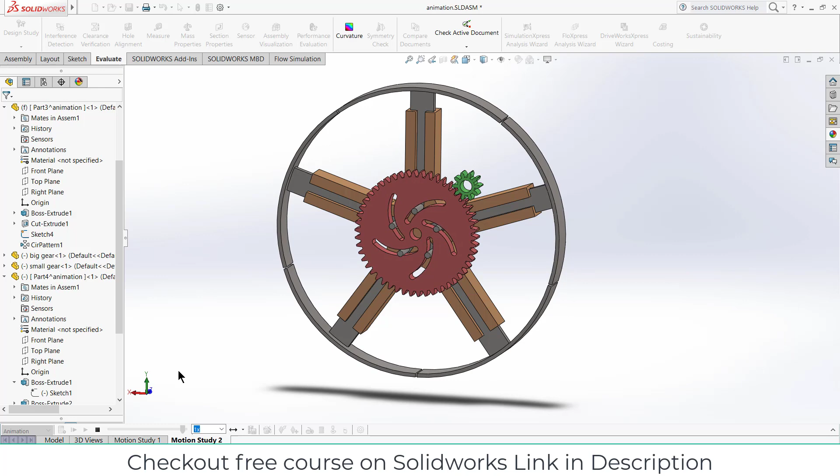Namaste guys, in this video we are going to make this mechanism. So let's start. First click on assembly, click on OK.

Now go to your design library, click on toolbox, click on add-in now, click on ANSI metric, click on power transmission, click on gears, select the spur gear.

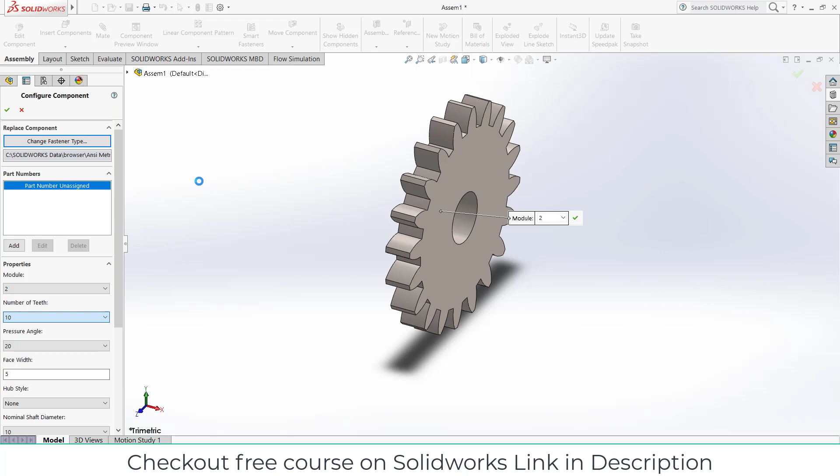Make sure that the module is 2, number of teeth is 20, or let's reduce the number of teeth. Let's say number of teeth is 10. OK, now click on OK.

Close this, select this face, press Ctrl plus 8. Now right click on it, click on sketch. Click on convert entities. Select this inner circle as well. Click on convert entities. Press Ctrl A, press Ctrl C to copy the sketch.

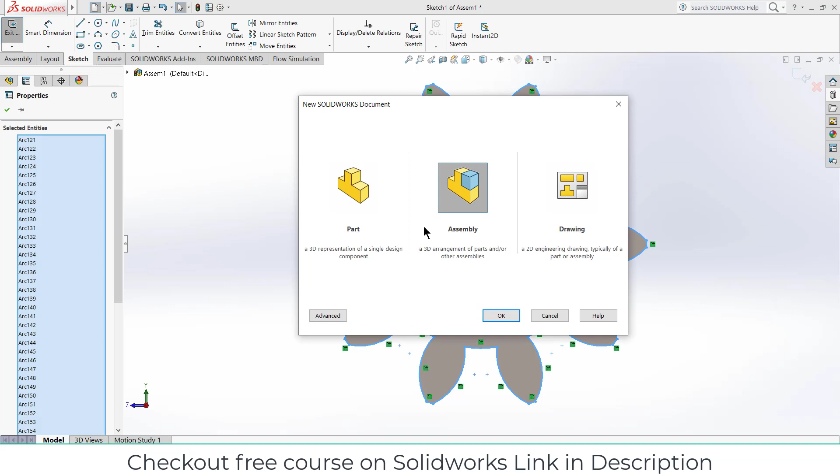Now click on here, click on part, click OK. Select the front plane, click on sketch. Press Ctrl V and go to the features, click on extrude. Extrude up to 10 mm. Click OK.

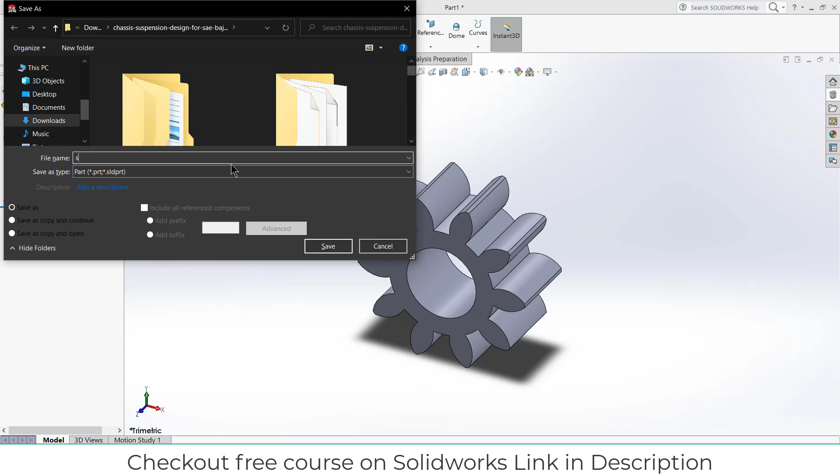Press Ctrl plus S and save the gear name as per your requirement. Small gear, let's name it, and close it.

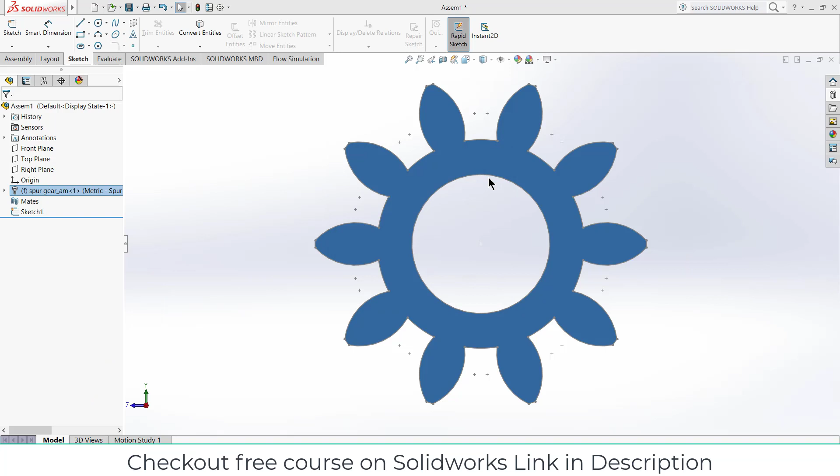A question might arise in your mind that why I am not using this gear. The reason is that when I will save the assembly and use this, my whole design library will run, so I don't want it. That is the reason I'm not going to save this. That is the reason I'm making separate parts.

Click yes. Now go here, click on spur gear, again import it. Now this time increase the number of teeth as per your requirement. I am increasing up to 40, or let's say increase up to 50, is fine. Now click on OK.

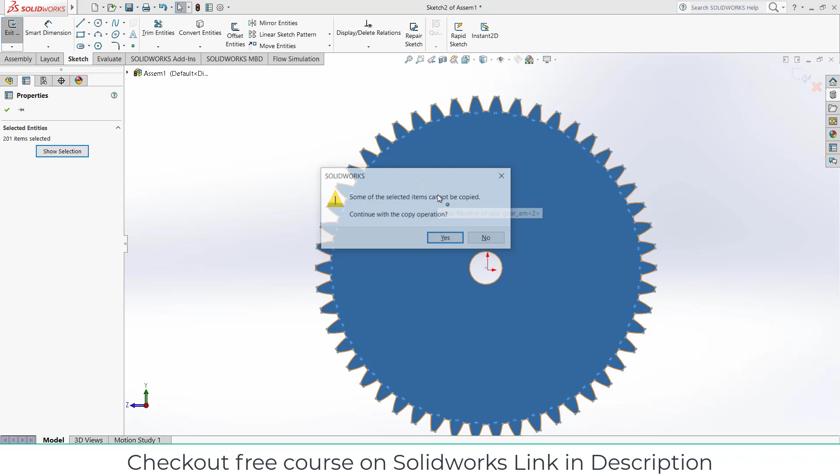Select this face, click on sketch. Now click on convert entities. Again select the inner circle. Click on convert entities. Press Ctrl A, press Ctrl C to copy the sketch. Close this and exit the sketch mode.

Click on here, part, click OK. Select the front plane, click on sketch, press Ctrl V. Now go to the features, click on extrude both face, thickness is 10 mm, click OK. You can save the part as per your name requirement, big gear.

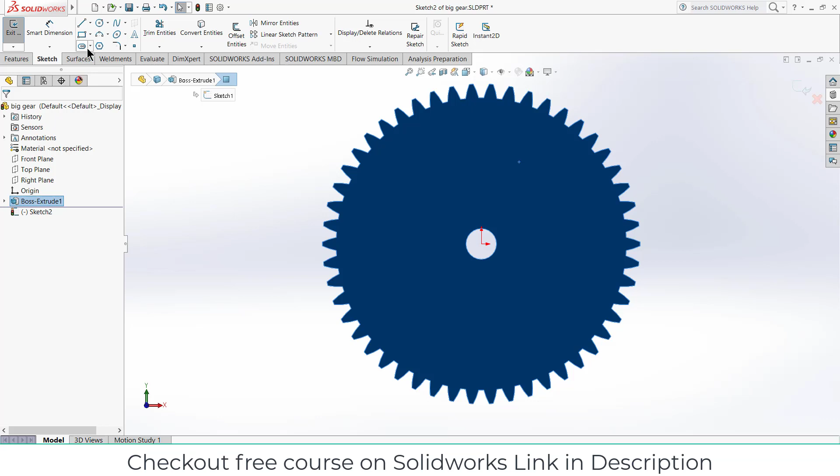After that select this face, click on sketch, press Ctrl plus 8. Now I'm going to make some grooves here. So enter the number of grooves as per your requirement. Basically I'm going to use the slot command, so you can use slot command as per your requirement.

It's not like you have to copy the same slot dimension as I'm doing it, so make it as per your requirement. Sorry, select the slot.

Escape, select this point and this point, make it horizontal. Give it a distance as per your requirement. I am giving it a distance of 20 mm.

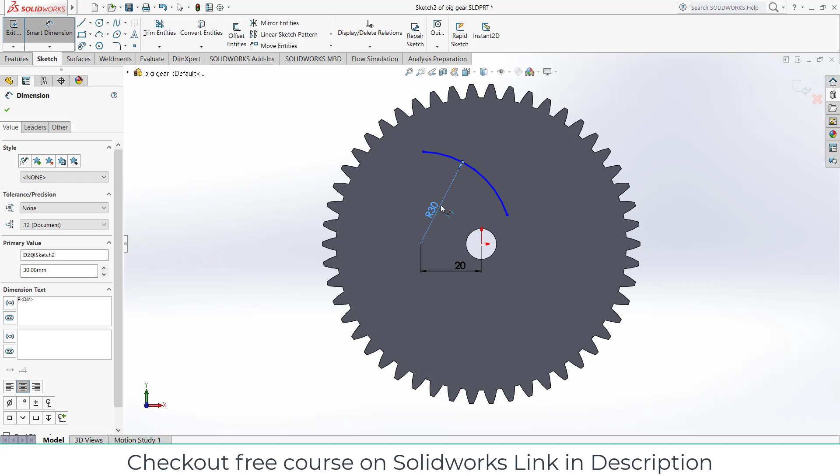And let's decrease the radius, let's say 30 mm, and increase this size, let's say 5 mm.

Escape, select this point and just leave it. After that what you need to do is, or you can also define the angle. Let's say the angle is 70 degree.

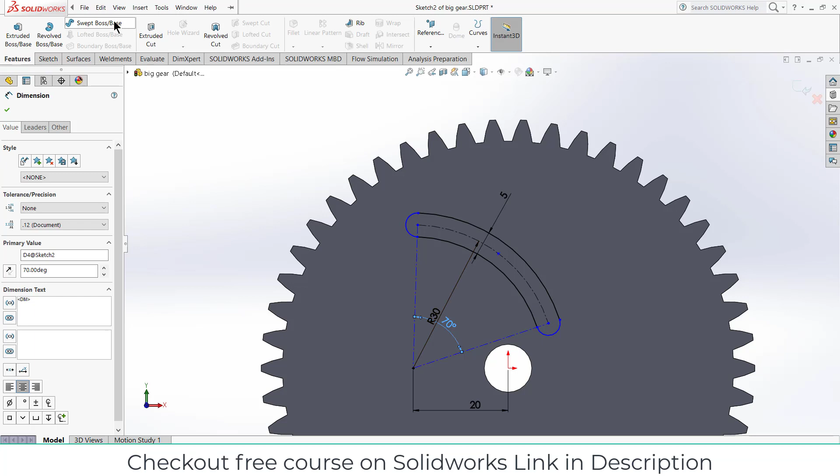And after that what you can do is click on here, click on extrude cut, click OK. And what you need to do is go here, click on circular pattern, select the center of it.

Now increase the number of cut to 5. You can increase up to 6, it again depends on your requirements. So okay, now press Ctrl S to save it.

Now close this and delete the sketch here as well as the gear.

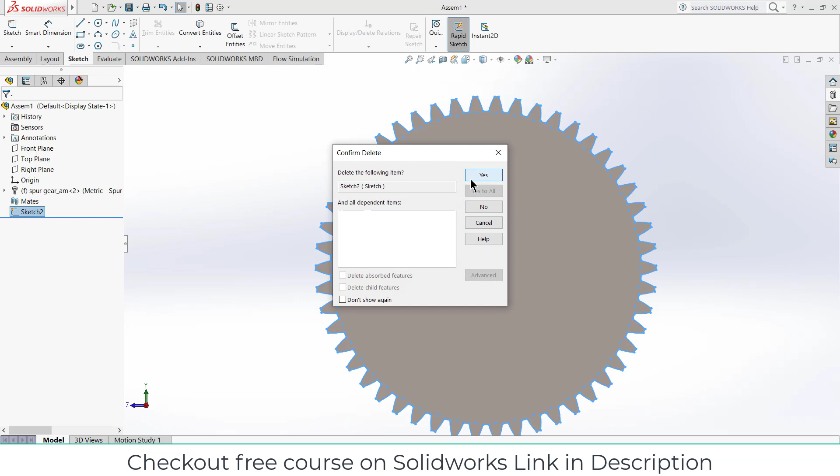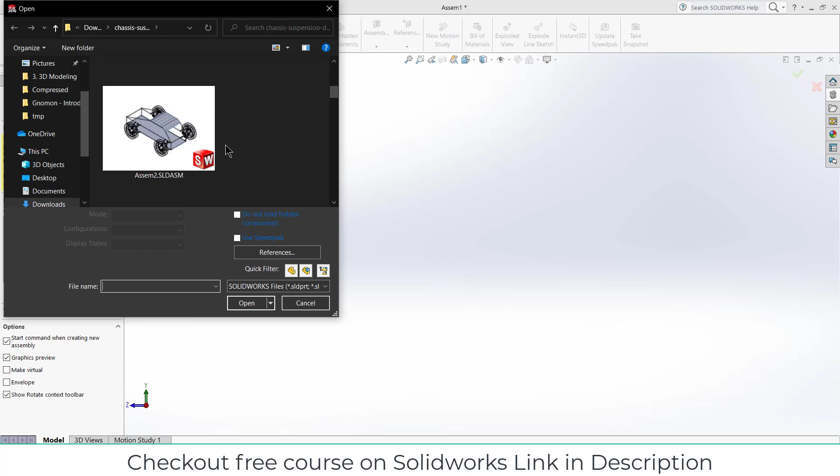Select this one and just type gear. So select this part and this part by pressing Ctrl and click on open.

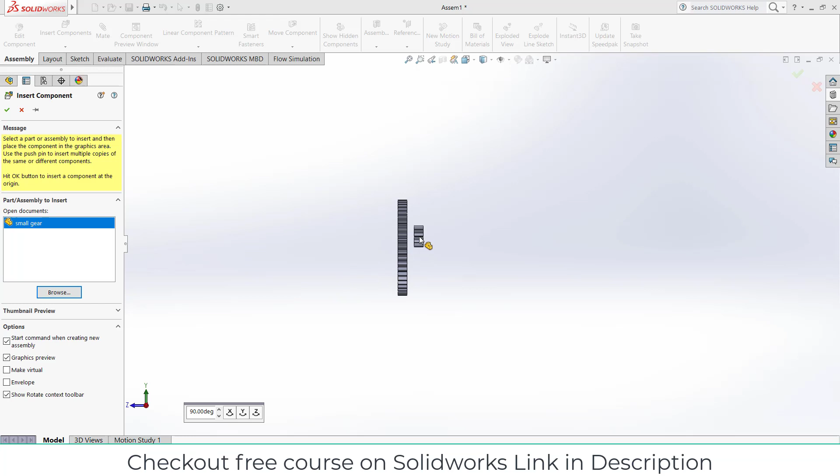Now first we have to do defining mates. So what we can do is select the front plane, or before that select the right plane, click on sketch, press Ctrl plus 8, draw a simple center line, escape and exit the sketch.

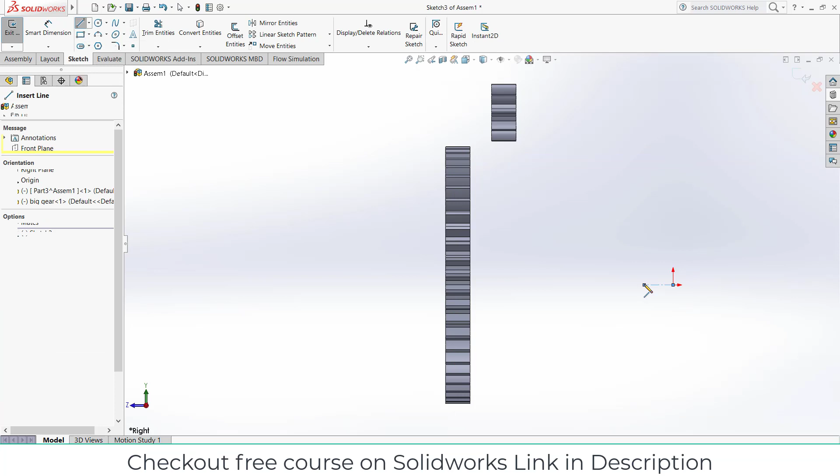Now what we can do is click on here, select this and this line, make it concentric, click OK, select this face and select the front plane, click OK.

Similarly, we have to make something for this. So what we can do is just move this gear aside here, select this face, press Ctrl plus 8, select the front plane, click on sketch.

So I know that this gear has module 2 and number of teeth is 50, so it means that 2 times 50 is 100, so 50 mm from here. And this one is module 2 and number of teeth is 20, so 70 mm. So I can make it anywhere up to a distance of 70 mm.

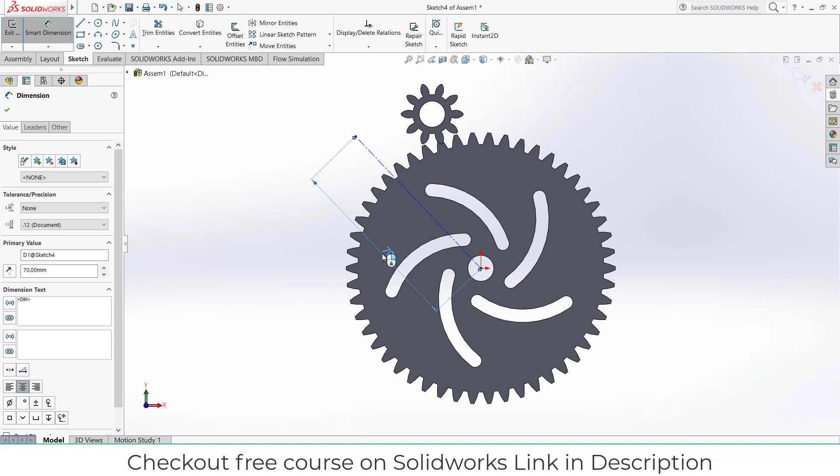So draw a line, make it 70 mm. I'm using simple concept, not something high physics or something else, just using simple engineering. Not 70, 60.

Let's say it will be here. I just saw this design on internet. I don't know what is the dimension, I just simply saw it on internet. I thought I can make it, and here we are.

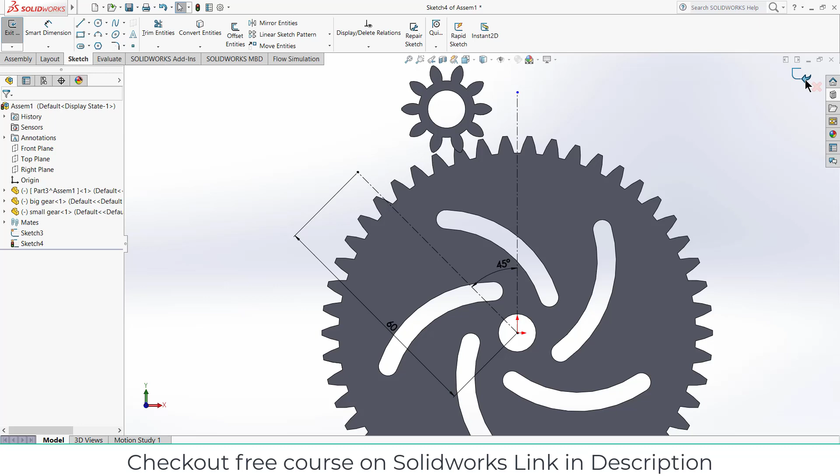Exit the sketch mode, select this face, and by pressing Ctrl select this point, click on concentric. Select this face, by pressing Ctrl select this face, click on coincident. Select this face, press Ctrl plus 8. Now as you can see, this gear is also perfectly aligned, so I don't need to do anything else.

So let's define our mates. Go here, click on mechanical mates, click on gear.

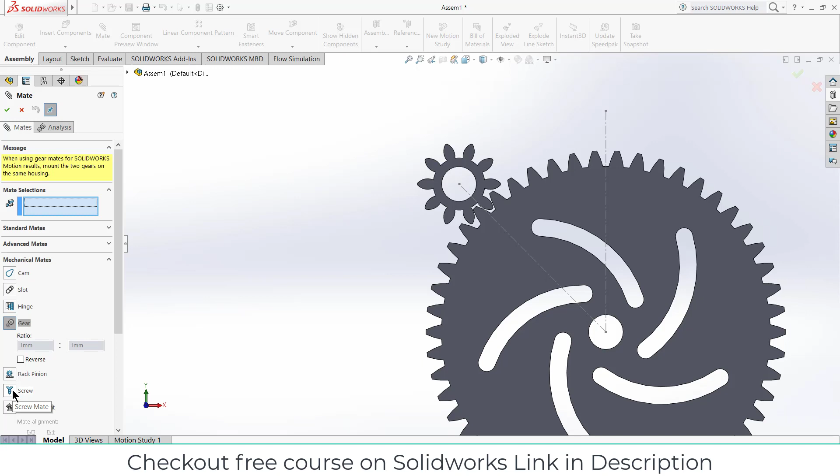Select this face and this face. Now here you can see the teeth is 10 by 10. So this is not the thing we want. Here the teeth is 10, it is correct, but here the teeth is not 10, it is 50. Click OK and close it.

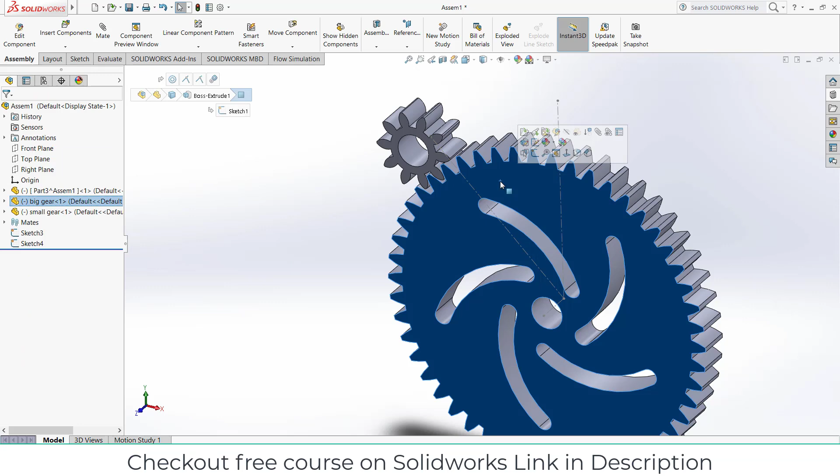Now select this face, press Ctrl plus 8. Now if I try to rotate it, you can see I am getting the correct results. So this is basically what I want.

Now let's make other parts. Remember the first part that we have made here accidentally. Select this part, click on edit components, select the front plane, click on sketch.

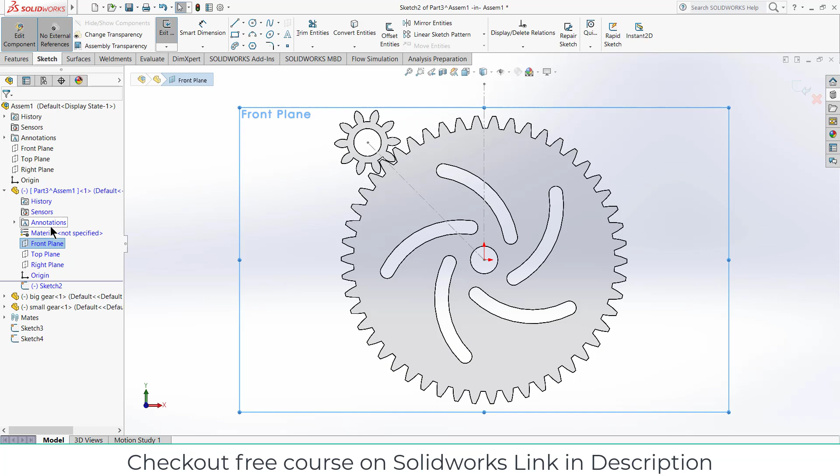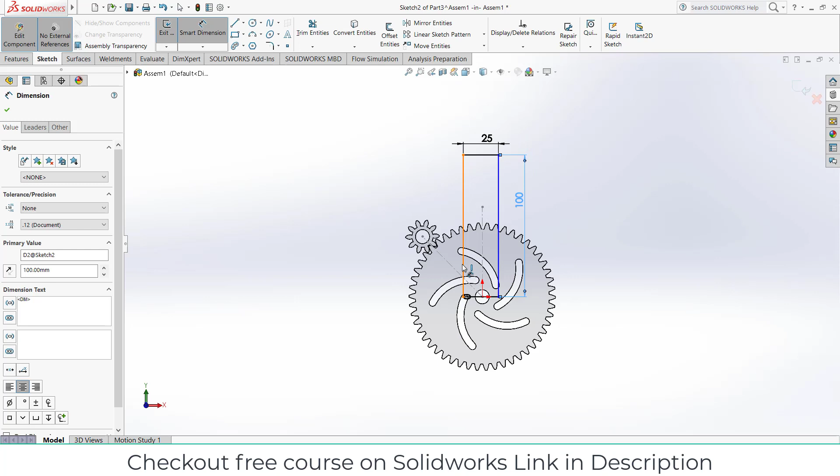So first we have to make some rectangles. Let's make it 25 mm. As you can observe, it is quite small. It is not big because every dimension is mm, so yeah, it is very small thing, but again you can make it bigger as per your requirement. It's an easy one, not a difficult one, so you can do it.

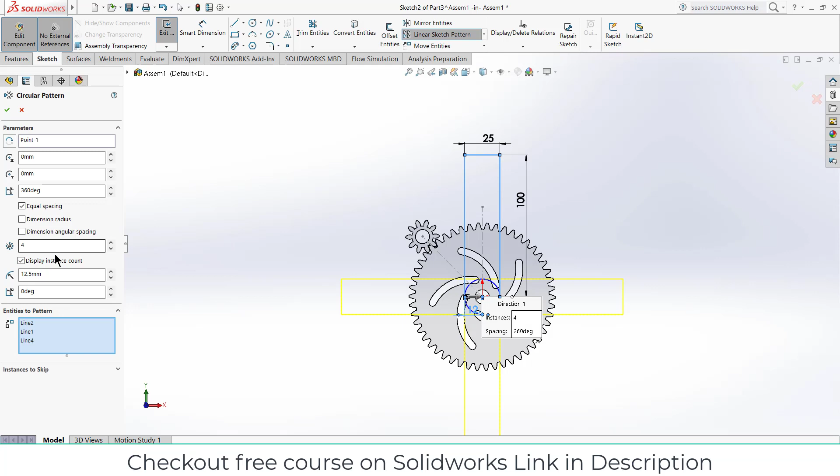25 divided by 2. I'm again repeating that I don't have any dimensions of it, I'm just making it roughly. That's just the thing. And I want to do this 5 times because I have 5 slots.

Click OK. After that, click on here and trim all the necessary lines. Features, extrude it.

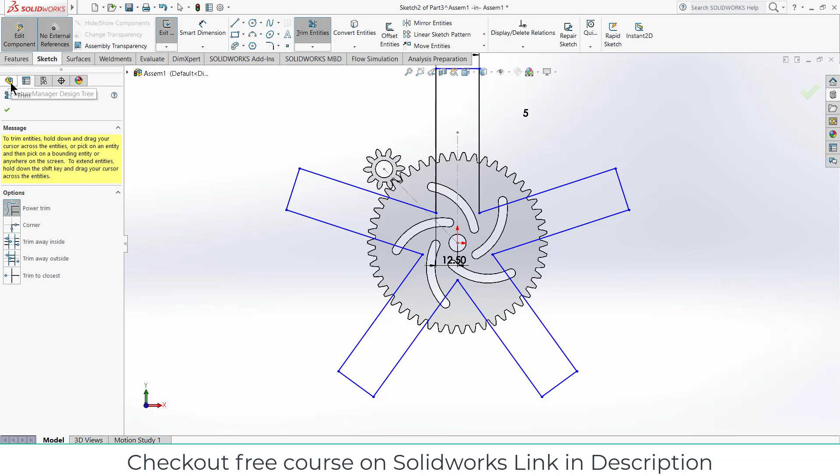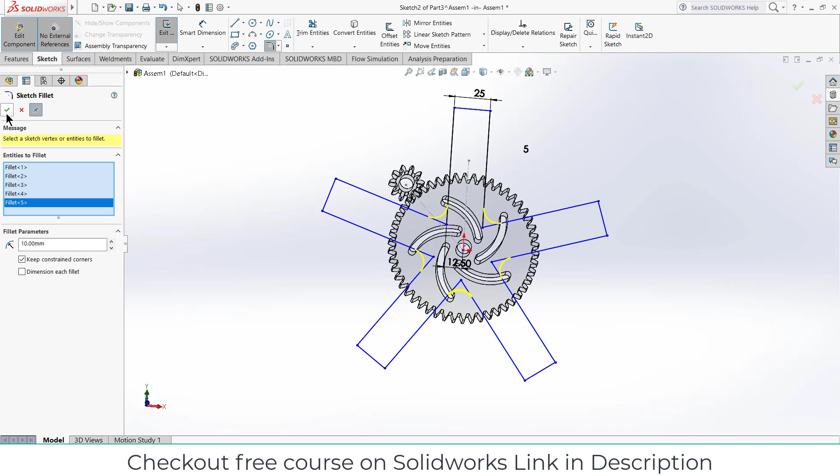Let's say 20 mm. Before do extrusion, let's add some fillet to make it a little good design. Click OK and go to the features. Click on extrude boss base, 20 mm. Click OK.

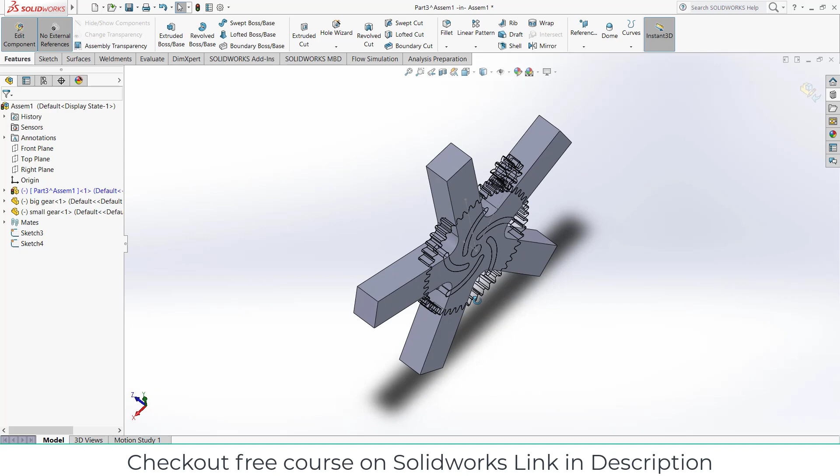Now I have to create some cuts here. So what I can do for that, let's see. First select this face, click on sketch, press Ctrl plus 8. So I can draw something like this.

Now what you can do is select this one, click on construction geometry, and 4 mm. Select this line, first select this line, make it horizontal, and after that give it a distance of 10 mm, and this one is 5 mm.

I'm again repeating that I am just looking roughly. Don't expect that I have exact dimensions or anything else. Even I don't know what are the dimensions, etc. Mirror about this line.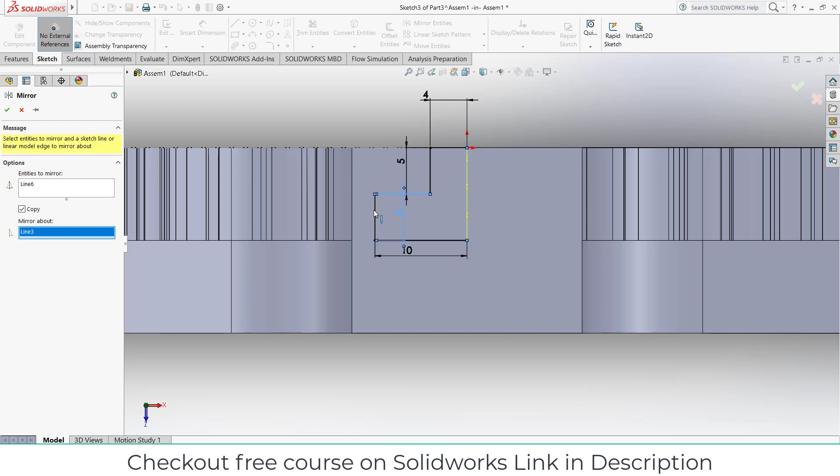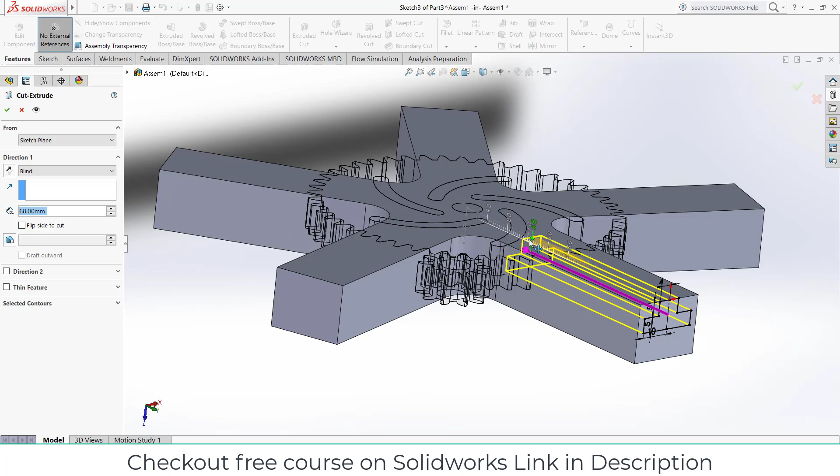Sorry, my bad. So select the line with respect to which we are going to mirror. After that, select the lines. Click OK, go here, click on extrude cut. Increase the distance up to here. Click OK.

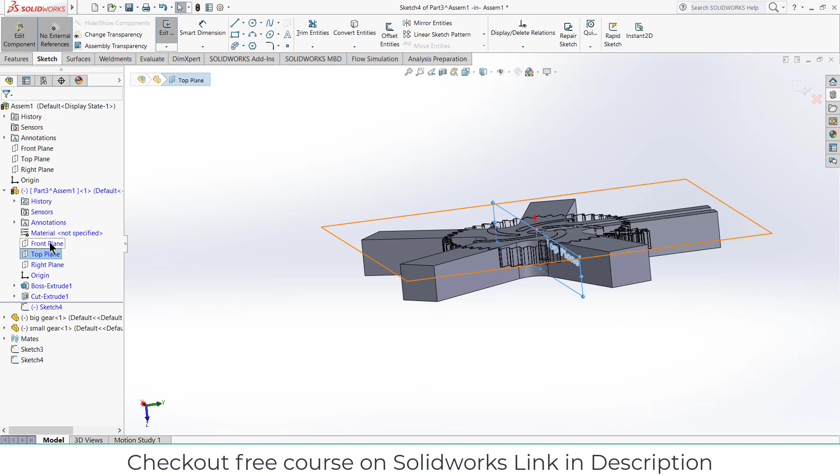Now before I go further, let's select the front plane. Click on sketch, press Ctrl plus 8. Draw a simple center line here. Escape, exit the sketch mode, and in features go to the circular pattern.

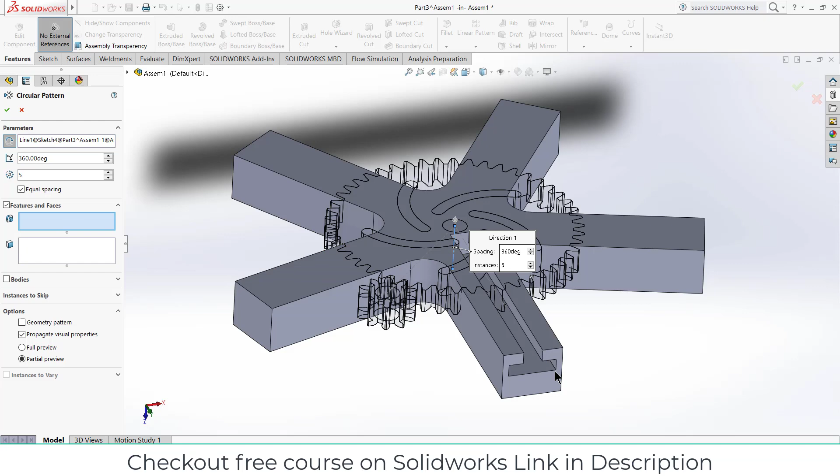Select the center line, select the features we want to be patterned. The number of instances is 5. Click OK. Don't worry about this pentagon shape because this is not going to be shown up.

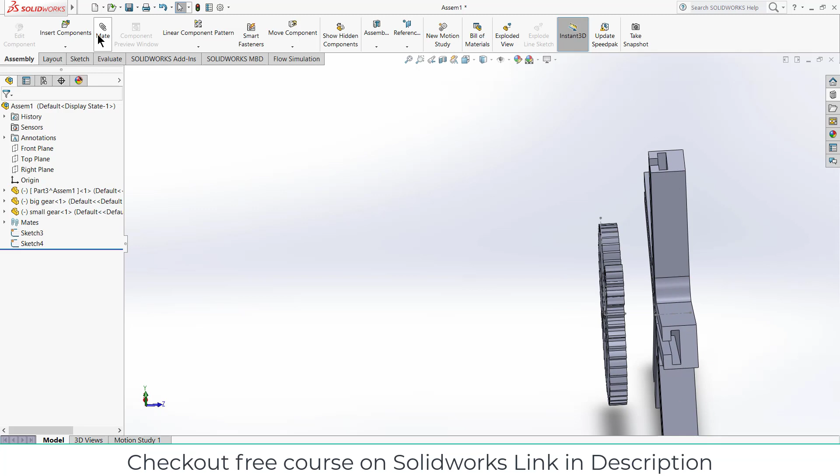Now exit the sketch mode, edit assembly mode, sorry, and move this part backwards. Click on mates, select this line and select this line, make sure they coincide with each other. Select this face and select this face. Click OK.

Now we have done making up to this point. Now all that's left is that one thing that will basically move in the slot. Let's try to make it the last part.

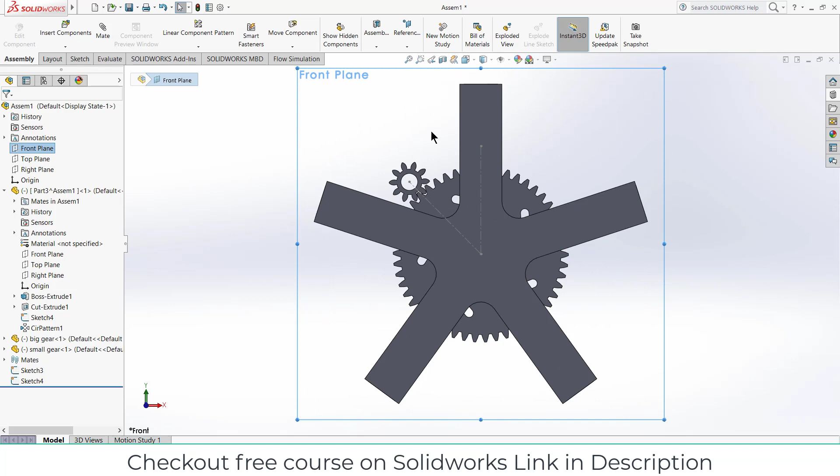Select the front plane first, press Ctrl plus 8. And as you can see, when I press Ctrl plus 8, it just moved that side. Not going to lie, but I like this, whatever. So let's start the making thing.

Ignore my chat. Select the front plane and select the front plane. Press Ctrl plus 8. Now make a rectangle first of this, 20 mm.

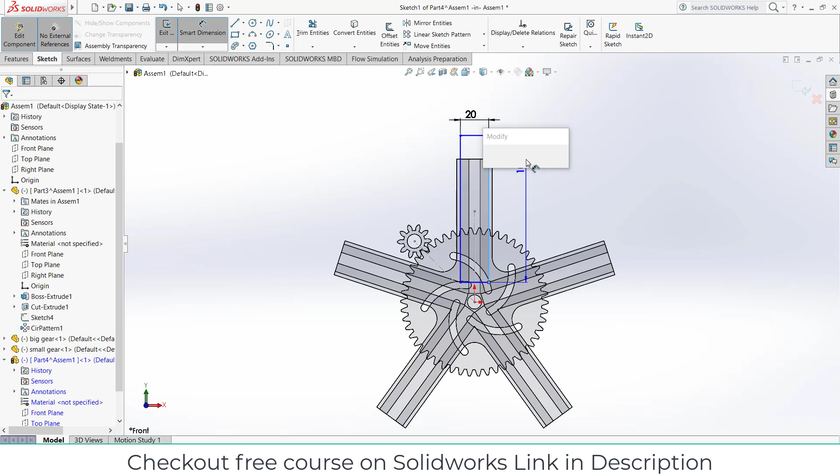Make sure external references is checked on, else you will face problem. I also see lots of people complaining that what I'm showing isn't working. Look, it's not going to work because you don't copy my dimensions exactly. So make sure that you copy this thing, especially no external references, else you will face a lot of problem. I warn you.

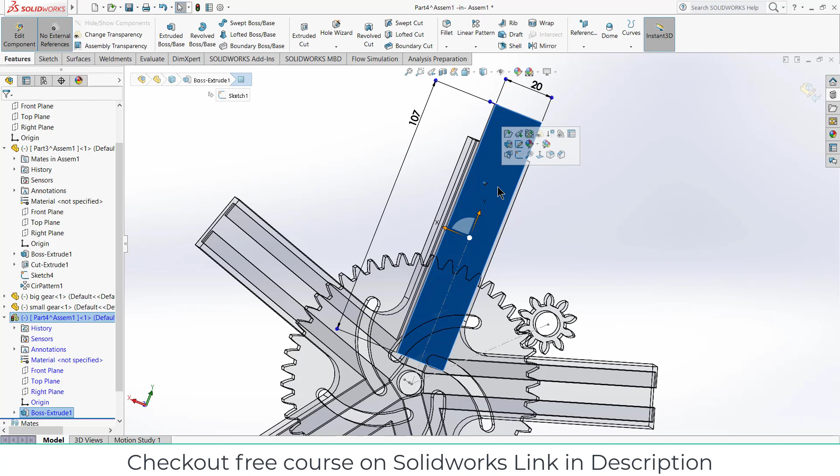Click OK, go to features, extrude up to 5 mm only, and OK. Now what you need to do is select this face, press Ctrl plus 8, and draw a slot circle shape basically.

Give it a dimension as per your requirement, let's say 5 mm, and extrude up to 20 mm.

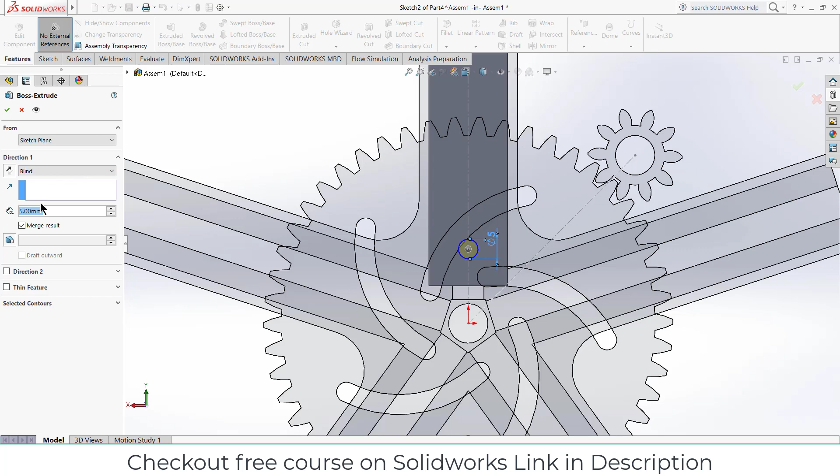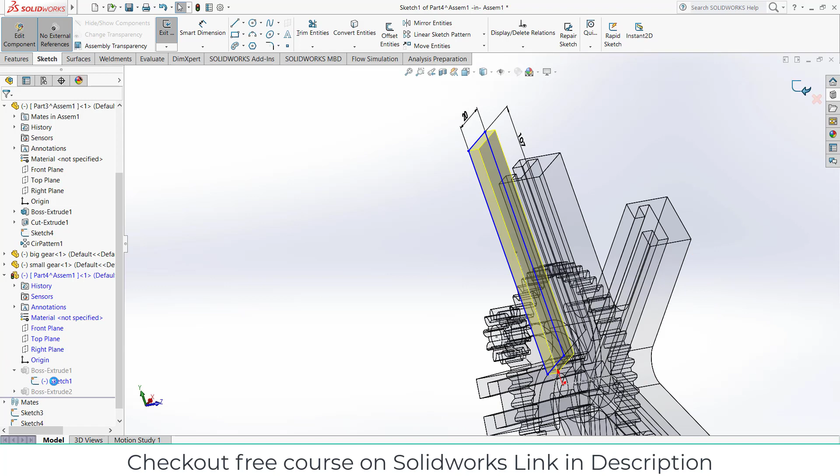After that, select this one. We can do something better. Select this one, go to features, right click on it, and select the midplane. Click OK.

After that, select the front plane, click on sketch, press Ctrl plus 8. Now we need to draw a circle-like shape, not a fully circle.

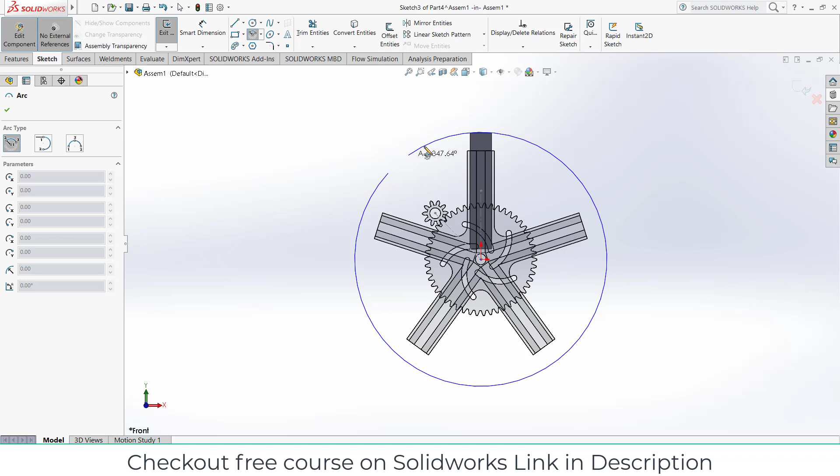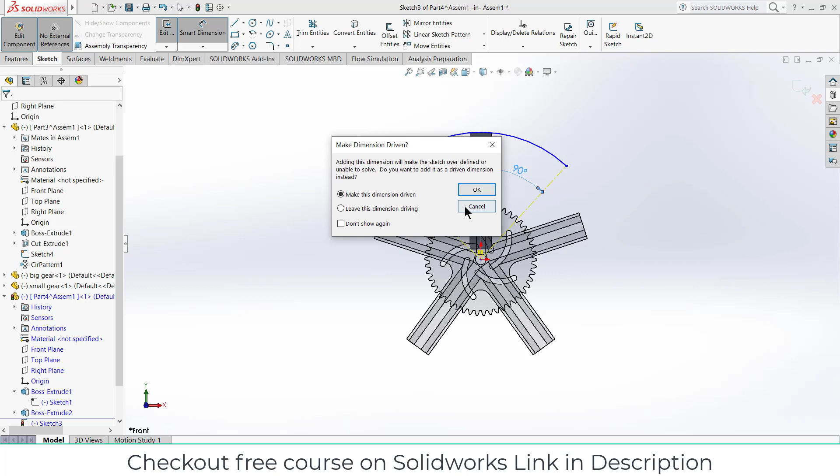And draw the center lines like this. Escape, give it an angle. So this is a pentagon, so 360 divided by 5. Okay, I am getting an error. Why? It is basically 360 divided by 5. No, 360 divided by 5 is not 90.

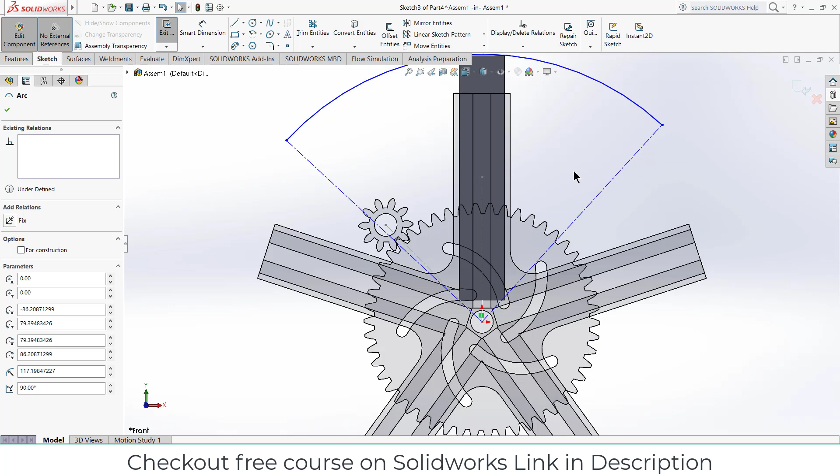Let's check if there are any kind of relations there. If there is, we will delete it. So to see constraints, click on view, relations. So this one is basically perpendicular to it. Okay, this one is not fixed as well. And I don't know why we can't give dimensions between them. Make dimension driven. There is some mistake that we need to see.

Let's draw a center line first. Escape, and let's delete this semicircle. I think there is a problem with it because it's not working as per my requirements.

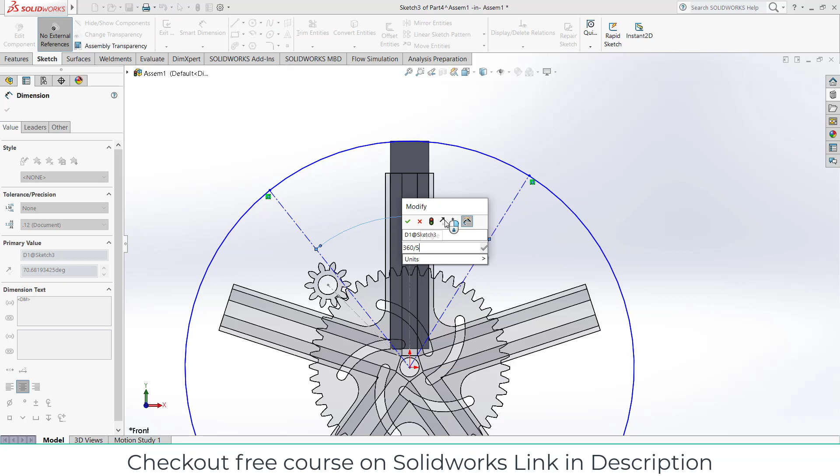So simply what we can do is draw a circle. Now draw center lines. Escape. So the angle between them is 360 by 5, 360 degrees divided by 5, because the pentagon shape is 72 degrees.

Okay, and I have to add one more dimension here. Escape and select this line, make sure it is vertical because this is our requirement. So it is 72 divided by 2.

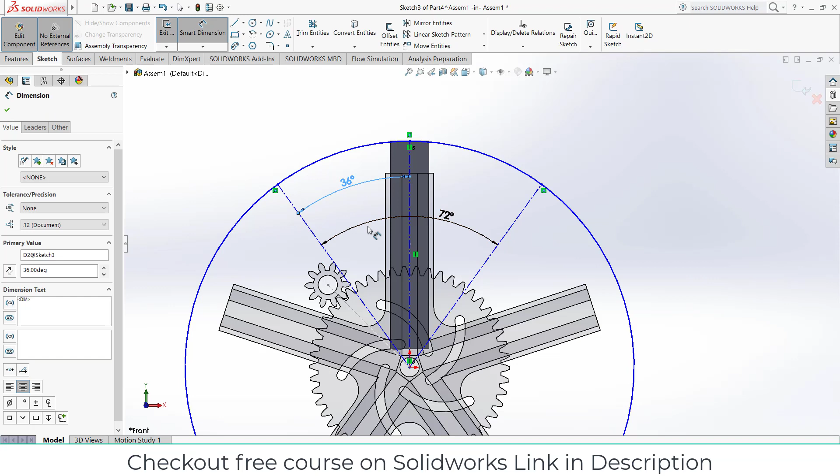Now it's in perfect condition. Trim the necessary lines, go to features, extrude it, midplane, thickness is 3 mm, and click OK.

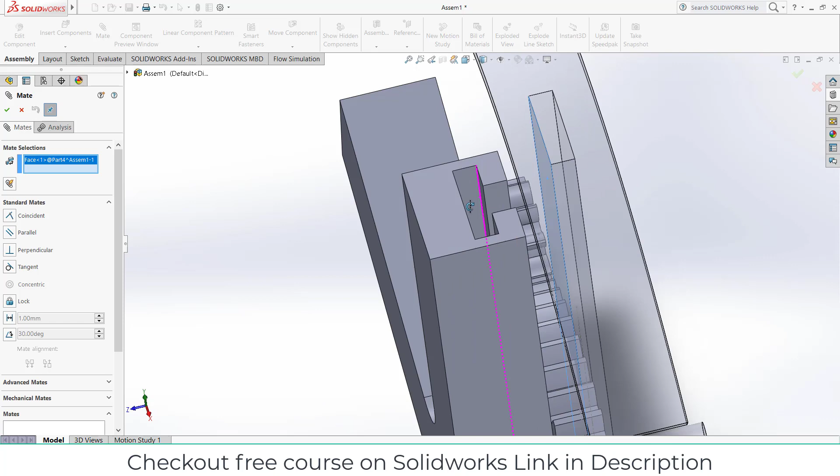After that, exit this one. Now what you need to do is go to the mates, select this face, and select this face, click OK.

Now go to the mates, click on slot, select this thing and this slot, click OK. Now click OK.

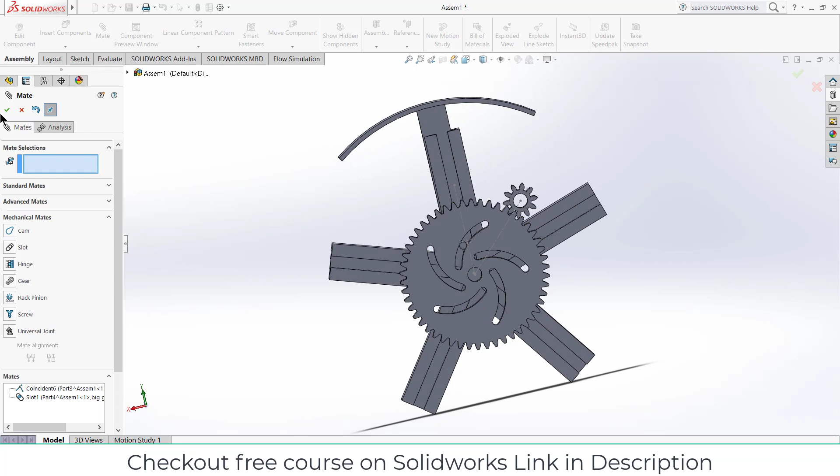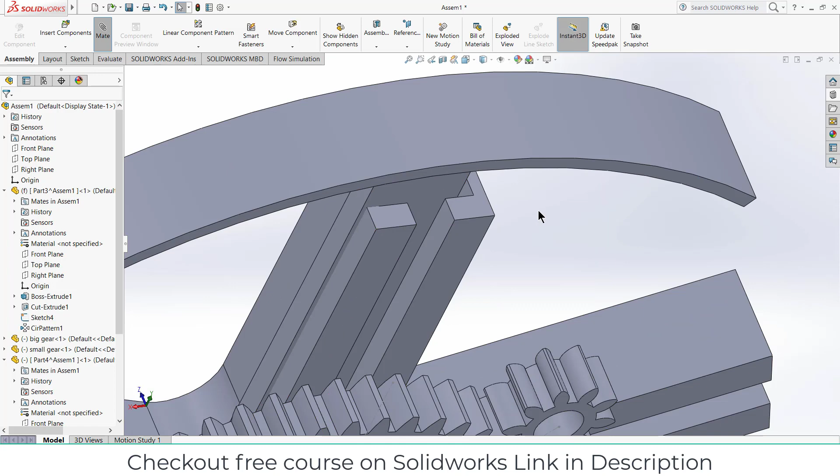Select this face and this face by mates. Select this face and this face. Okay, first close this. Right click on it, click on fix because I don't want this part to move. So select this face and this face. Click OK.

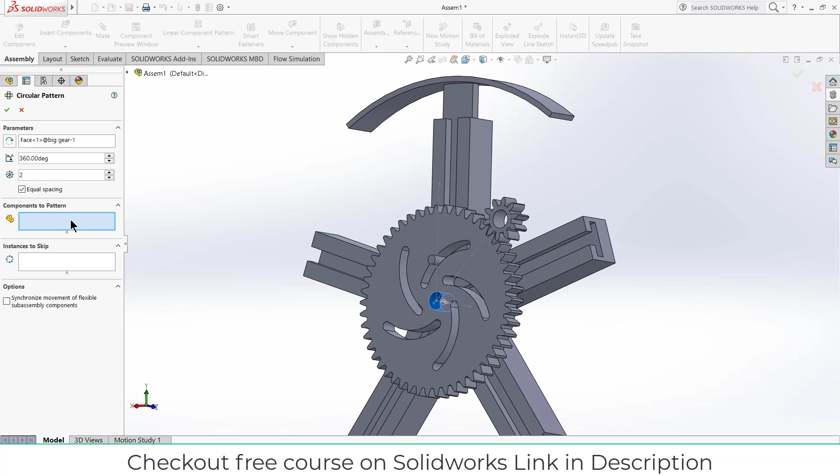After that, go here, click on mirror — not mirror, circular pattern. Select this one, enter the value 5, click OK.

Select this face, press Ctrl plus 8. So if I rotate this, you can see it's rotating and we can make it big, so we can control it as per our requirement.

Now we will also define an angle distance limit because it's a necessity. So go to the mates. Let's first measure it, and after that we will define it.

So go to evaluate, click on measure, click on clear selections, select this line and this. No, not this one. So for measuring, we only define just one and it will do the rest of the work.

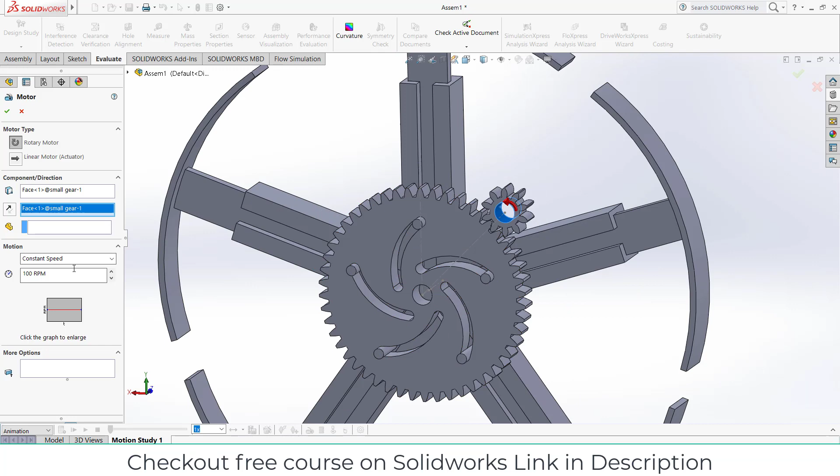Click OK. Now select this face, press Ctrl 8 and click on calculate.

120 is fine, I guess. Let's click on it, click on here. Let's increase the distance further, let's say 135. Click OK and click on calculate.

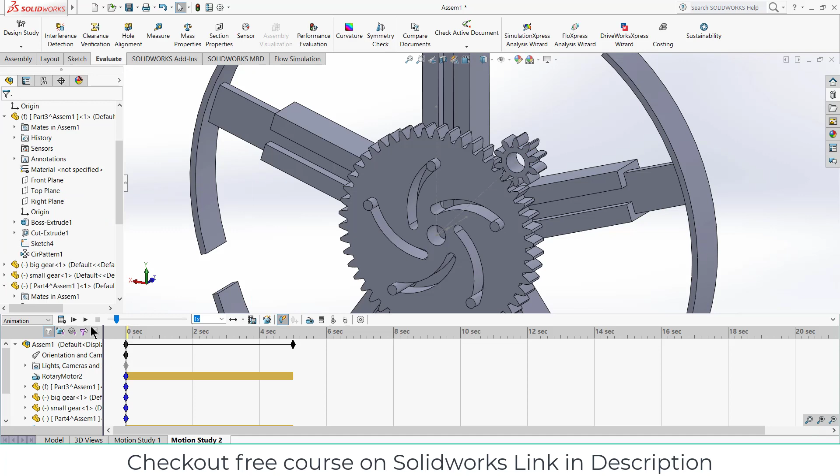As you can see, as I'm increasing distance, it is not increasing or decreasing, so it's basically a bug in SolidWorks. So what I have to do is create a new motion study, go here, and select this face again. Now I have to define distance again, this time 120. Click OK, select this face, press Ctrl 8 and click on calculate.

Okay, let's say it is 180. Click OK. This works, I think.

Let's say it is 200. You can play with it and do lots of things if you want to. It's not like you have to just copy my dimensions — you can do a lot of things as per your requirement as well.

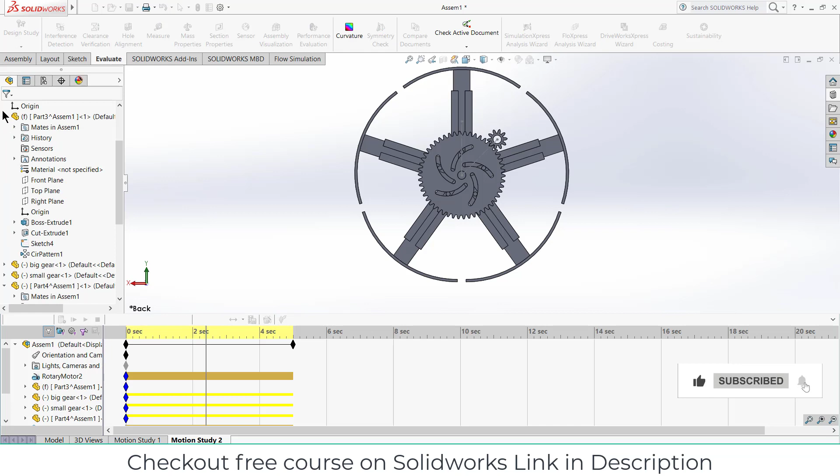First go here. As you can see, it is correct now, so let's increase the fps to 30 and click on play. Let's remove these unwanted lines. As you can see, the lines are not showing up here. Right click on orientation, click on disable, so we can easily view the animation.